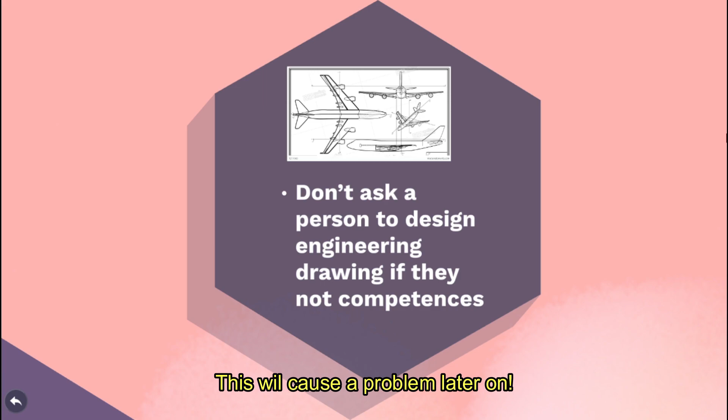Don't ask a person to design an engineering drawing if they're not competent. If someone doesn't have any competency in their field for drawing, you should not ask them to draw mechanical or electrical drawings. This will cause a problem later on, so you must not hire someone who is not competent.

Next is don't sign or stamp a report or plan that you did not create. If you are not sure where the plan or report came from, you must not sign it, because if you sign any report or plan, it means it is under your responsibility.

The third one is political parties. Do not engage or form a partnership with any party that is not permitted. As you all know, there are a lot of parties in Malaysia, and many of them are not permitted, so you should be aware of it.

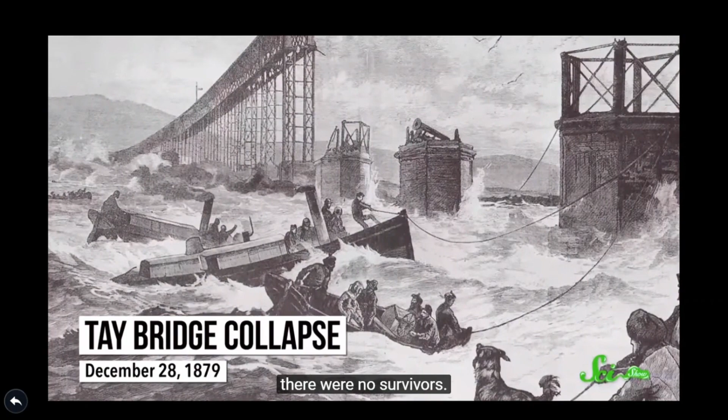When it opened in 1878, Scotland's 3.2-kilometer Tay Bridge was the longest bridge in the world. It was so impressive that Queen Victoria knighted Thomas Bouch, the bridge's designer, after she took the train across it. But on December 28, 1879, a train was crossing the Tay Bridge during a violent storm when the middle of the bridge collapsed. The bridge, the train, and the 60 or so people on board crashed into the water below. There were no survivors. An official investigation found so many problems with the bridge's construction and design that they couldn't even figure out what failed first.

But according to their report, Bouch did just about everything wrong. They tested a lot of the bridge's surviving components, for example, and found that they couldn't stand anywhere near the pressure they were supposed to. So the bridge would have failed eventually anyway, and the storm just accelerated things.

Investigators looked at the columns that had been holding the bridge up and saw that they were broken at the bottom, so the columns might have been responsible for the bridge's collapse. The winds could have made the train rock as it went along, maybe even forcing it against the bridge's walls. If that had happened, it would have put a lot of extra stress on those columns, breaking them and bringing the bridge down.

Whatever the reason the Tay Bridge fell, engineers found even more problems when they looked at some of Bouch's other projects. Some of their components were either just as badly made as the ones on the Tay Bridge, or arranged in ways that meant they couldn't hold much weight. Apparently, he just wasn't a very good engineer. The Tay Bridge disaster made it clear that those projects were also ticking time bombs, and that bridge inspections had to be way more thorough.

The other bridges were either quickly repaired or destroyed to prevent another disaster. But the Tay Bridge, of course, was not the last bridge to collapse. The Quebec Bridge was set to become the longest cantilever bridge in the world when construction began in 1900, but it collapsed twice before it eventually claimed the title in 1917.

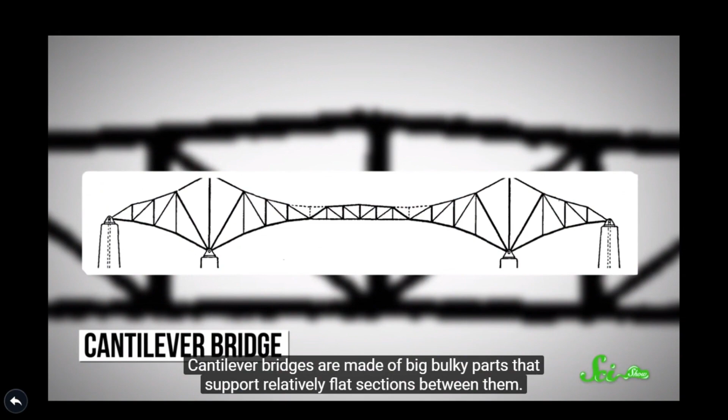Cantilever bridges are made of big, bulky parts that support relatively flat sections between them. During construction, workers kept noticing that some of the support pieces were bent more than they should have been. They were holding way more weight than they were designed to, partly because the bridge ended up longer than it was originally planned to be, but to save time and money, extra support wasn't added.

The designers hoped that the problem could be fixed as construction went on, but at the end of the workday on August 29, 1907, parts of the bridge collapsed under their own weight, killing 75 workers.

Construction resumed after investigators figured out what happened. Their main conclusion was that the bridge's components just weren't strong enough. So the bridge was rebuilt, this time much bigger and stronger, but all that extra metal made it much heavier too.

As the middle section was hoisted into place in 1916, the equipment bringing it up broke and it plunged into the river below. This time, 13 people died.

The Quebec Bridge disaster was a reminder that it's important to make sure that the thing you're building can carry the weight you're putting on it, and it probably would not have happened today. Over the last century, engineers have developed tons of new mathematical techniques and computer programs that probably would have caught the first collapse long before the bridge was even built.

Even before it opened in 1940, people noticed something strange about Washington State's Tacoma Narrows Bridge. It moved. Gentle winds could make the long suspension bridge flex up and down by meters at a time, making it hard to drive or even walk across. The bridge's designers tried to keep it from bouncing so much by installing shock absorbers, but they weren't very effective.

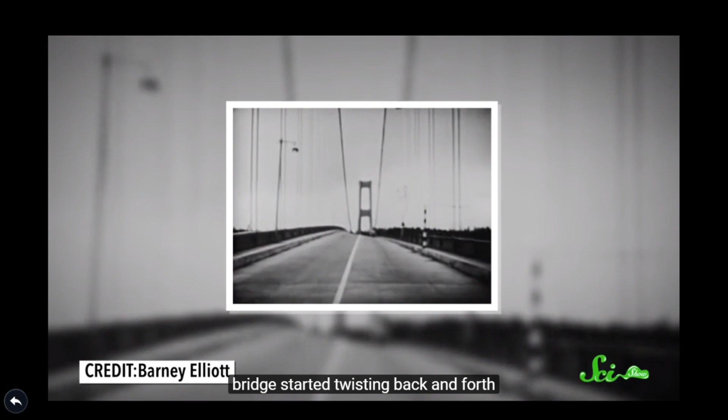When that first cable snapped, its side of the bridge fell slightly because it was less supported. Then other cables on that side pulled up like stretched out rubber bands, and the bridge started twisting back and forth. Then the wind gave each twist a little boost. Those small boosts built up over the course of the morning and eventually twisted the bridge apart.

Engineers learned their lesson pretty quickly and reinforced the Bronx Whitestone Bridge in New York, which was also known to flex in the wind. That bridge is still standing today. But not all failed construction projects have been bridges, though.

The 40-story Hyatt Regency Hotel opened in Kansas City, Missouri in 1980, and it quickly became known for its innovative atrium, which featured 3 long walkways that seemed to float in the air. The hotel called them skywalks. Instead of being supported by pillars, each skywalk was suspended from long rods hanging down from the ceiling. The second-floor skywalk hung below the fourth-floor skywalk, with the third-floor skywalk off to the side on separate supports.

Their unique design made the huge atrium an ideal place to host events and parties, like the one that the hotel hosted on July 17, 1981.

About 1,600 people attended. Hundreds danced and talked in the atrium, while others milled around the hotel and checked out the famous skywalks. Then, at 7:05 p.m., two of the skywalks suddenly collapsed without warning.

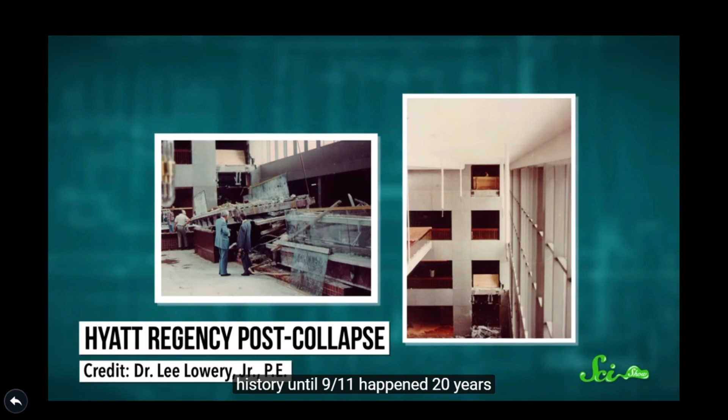114 people were killed and more than 200 were injured, making the incident the deadliest structural collapse in U.S. history until 9/11 happened 20 years later.

Investigators found a small, last-minute change to the rods holding the two collapsed skywalks that meant that instead of each holding its own weight, they were linked together.

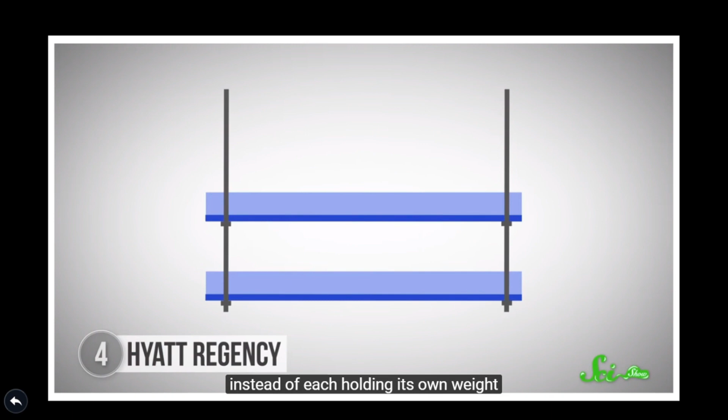Originally, rods went from the ceiling all the way through the fourth-floor skywalk and down to the second-floor one, with pieces underneath each skywalk supporting its immense weight. But after the change, the second-floor skywalk hung from the fourth-floor one. So supports for the fourth-floor skywalk weren't just holding up one 29-metric-ton skywalk, they were holding up two of them.

It also didn't help that to save some money, the building materials themselves weren't quite as strong as they should have been, and on the night of the party, the extra weight of a couple dozen people standing on the skywalks proved to be too much. What seemed like a tiny change to their construction turned out to have terrible consequences.

Manhattan's Citicorp Tower, now just called 601 Lexington Avenue, proves that projects with problems don't always end in disaster. The skyscraper's triangular top makes it stand out from afar, but you'd notice something else if you were just walking by. Citicorp Tower was built on stilts, which turned out to be a problem.

The stilts were built to accommodate a church next door that essentially said they could build the skyscraper on the property as long as it didn't block the church. So the building's designers just decided to start most of the tower nine stories up.

They knew that such a tall building with so little on its bottom floors could be prone to toppling over in strong winds, so they wanted to make sure that it could withstand even the strongest winds blowing against its windows. So they added extra weight to the top of the tower that moved in the opposite direction of any lean the wind might cause.

Wind against a skyscraper's corners usually just sort of slides past the building, so Citicorp Tower's designers didn't even bother checking for them. That probably would have been fine if the stilts were on the corners. But because of that weird thing with the church, the building's stilts are in the middle of its sides.

Let's have a look at metal industry accidents. This will open your eyes. Please have a look. Top 10 accidents in metal smelting.

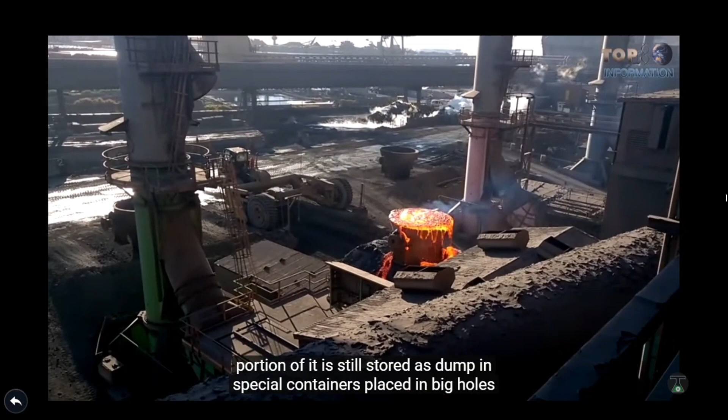Number 10: slag explosions. Slag, or metal waste, is the waste material after ore purification that will not be used in metal processing. Though there has been progress in recycling this waste material in recent years, a significant portion of it is still stored in dumps, placed in special containers in big holes on the ground. At least 24 hours are needed for slag to become solid and be disposed of. We must point out that after that time, the waste is still red hot.

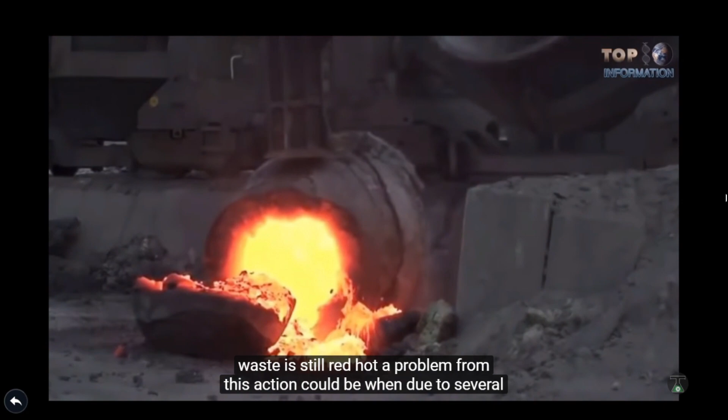A problem from this could arise due to several factors. When metal impurities mix with water, for instance, a big explosion can occur. In addition, just a little amount of liquid is enough to start a deflagration. Slag also brings other hazards to workers, though they are less visible. On some occasions, it emits toxic gases that could be lethal if workers do not have proper protection.

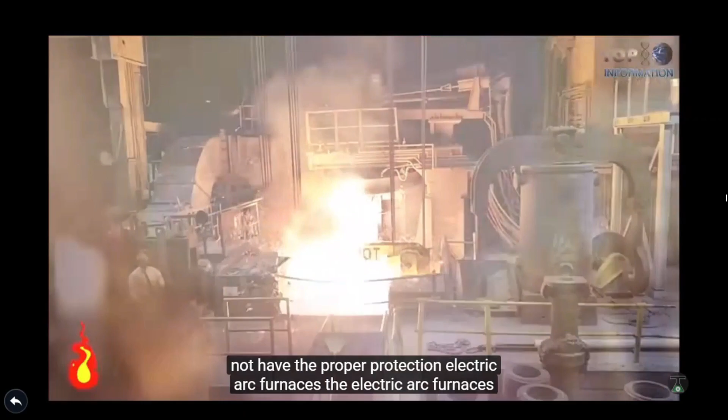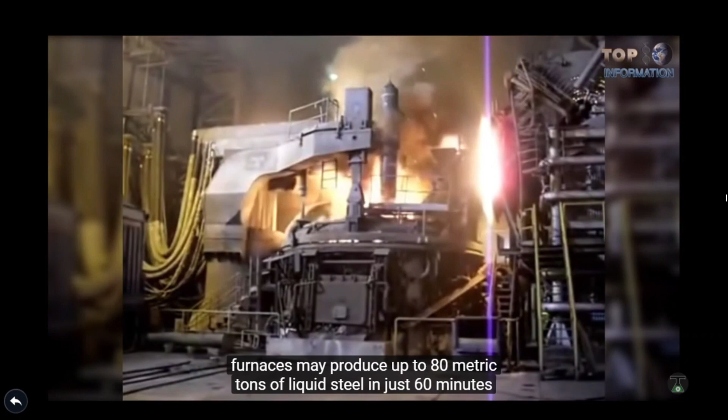Number 9: electric arc furnaces. Electric arc furnaces have been substituting traditional furnaces in many steel plants worldwide. The main reason for the substitution is their high effectiveness when producing metal from ore. For example, in more advanced workshops, these types of furnaces may produce up to 80 metric tons of liquid steel in just 60 minutes of operation.

To heat steel, an electric current going from one electrode to another is used. Despite the fact that these types of furnaces are considered much safer than the former ones, they are not free from risk. They must be cooled with water, and any small mistake when introducing the electrodes into them, or any trace of moisture on them, could produce an explosion.

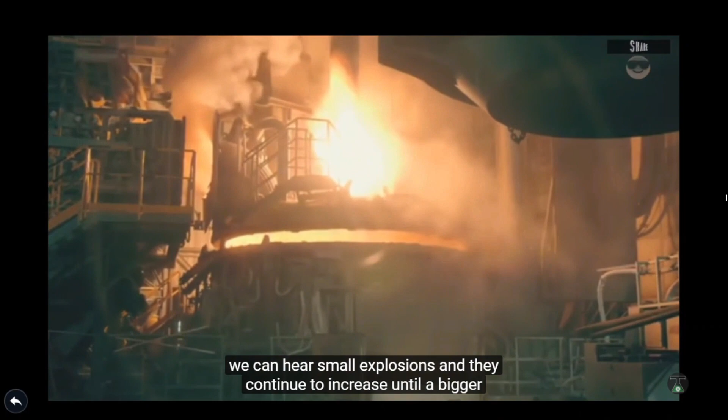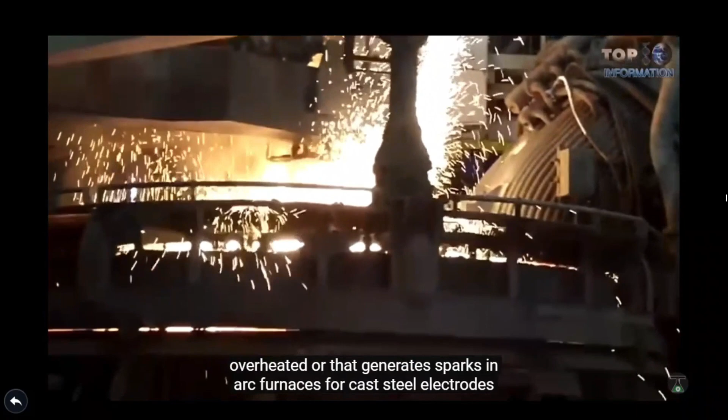This is what seems to happen in the video. When it is very hot, we can hear small explosions, and they continue to increase until a bigger explosion occurs. Another explanation for this explosion may be mechanical human error when introducing electrodes that have been overheated or that generate sparks. In arc furnaces for cast steel, electrodes are put in on top of the tank, and it is not always easy to do properly. On the other hand, accidents like the one in this video can occur.

In this case, the problem may be caused by the amount of slag in the furnace. This material behaves similarly to volcanic lava. Flames spread everywhere, and in the end, all the content is spread all over the place.

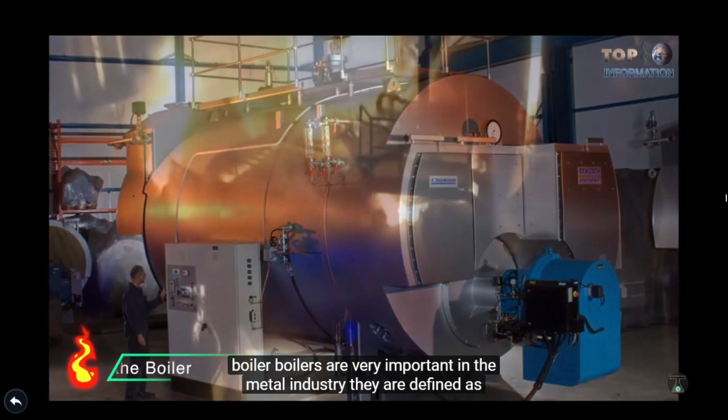Number 8: explosion in the boiler. Boilers are very important in the metal industry. They are defined as closed pressure vessels where a fluid is heated by applying the resulting heat externally.

There are diverse types of boilers with different characteristics depending on their structure and way of functioning. In general, they involve several safety measures, but when they fail, serious accidents may occur. The most serious accidents can produce dangerous explosions.

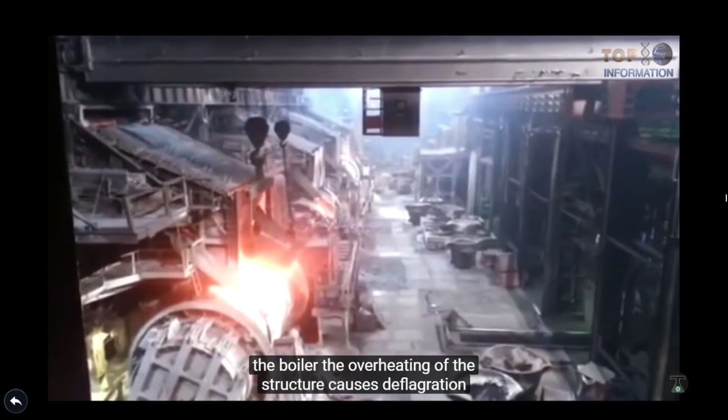One of the main causes of these explosions is a low level of water needed to cool the boiler. The overheating of the structure causes deflagration and a subsequent disaster. All boilers must have at least two indicators for water levels. Accidents are normally produced by human error in the maintenance of this device.

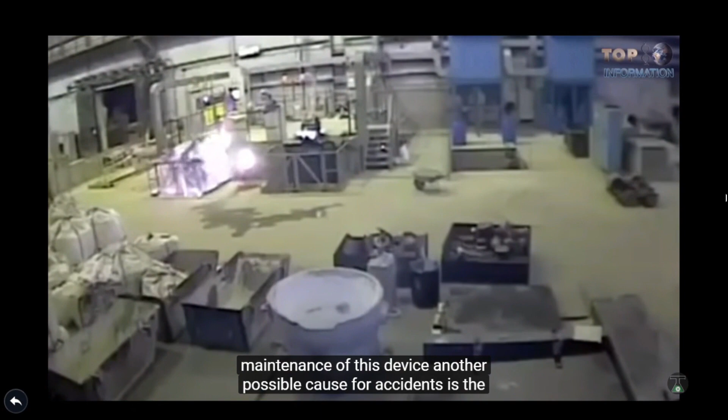Another possible cause for accidents is corrosion of the material they are built with, and of course, when water is mixed with the boiler content.

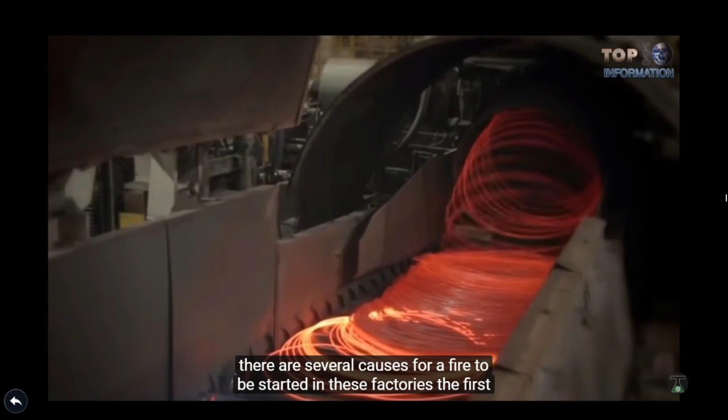One of the hazards to be considered in the metal industry is fire. Fire increases the possibilities for accidents to occur. There are several causes for a fire to start in these factories. The first cause to be considered is static electricity.

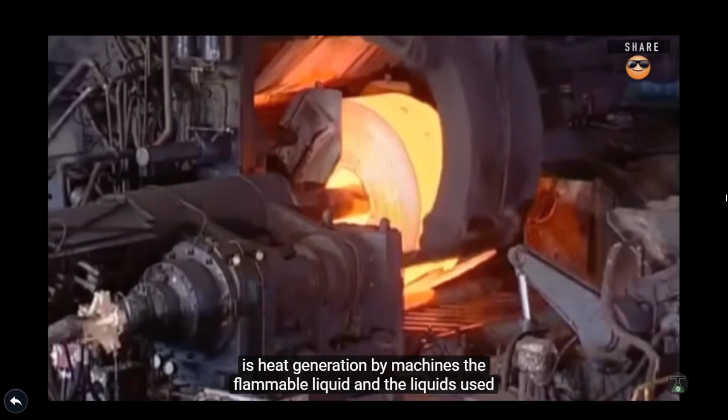Static electricity is originated by surface friction, and it can accumulate until it begins to produce sparks that will start the fire. Another cause of these accidents is heat generation by machines.

We can also point out causes of fire such as the overheating of electricity conducting cables and the spontaneous combustion of chemical products produced by high temperatures that are usually common in these factories.

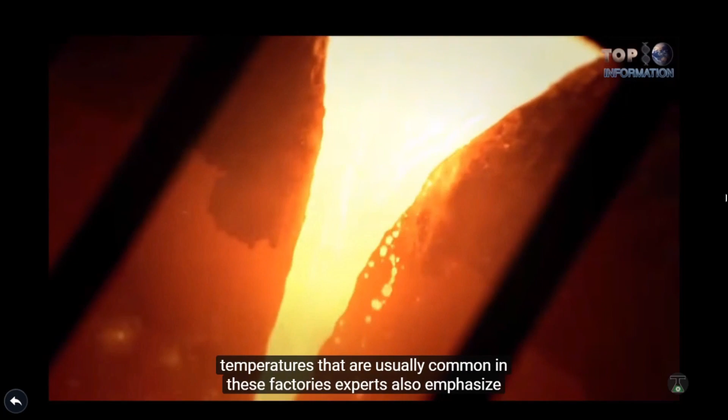Experts also emphasize the use of oils to lubricate or cool the machines. These oils are in many occasions responsible for the start of fires. They also contribute to their fast spread and very dangerous toxic smokes.

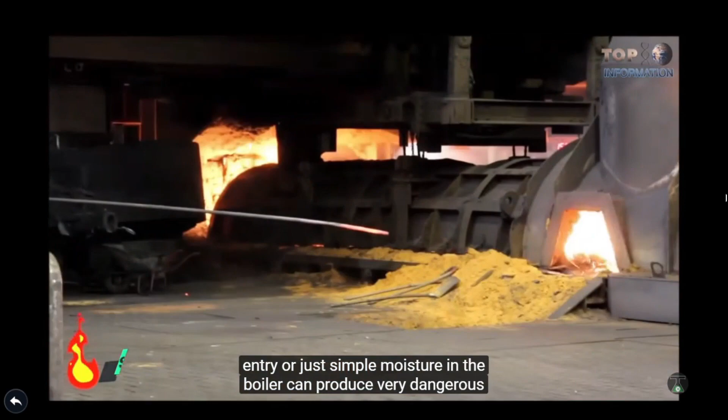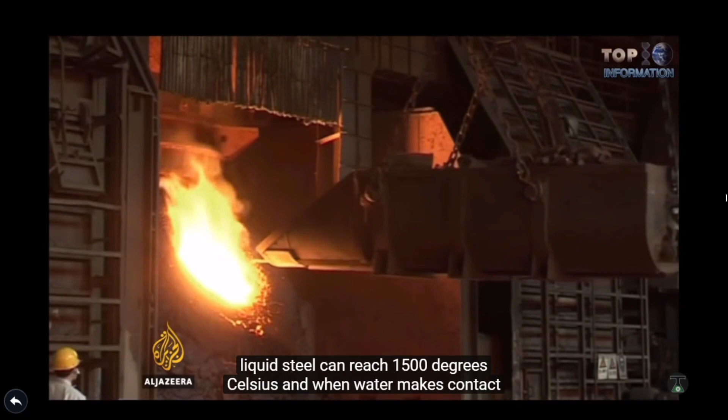Number 6: Moisture. Water entry or simple moisture in the boiler can produce very dangerous explosions that could put at risk the workers' integrity in the metal industry. Liquid steel can reach 1,500 degrees Celsius, and when water makes contact with it, everything put together can explode.

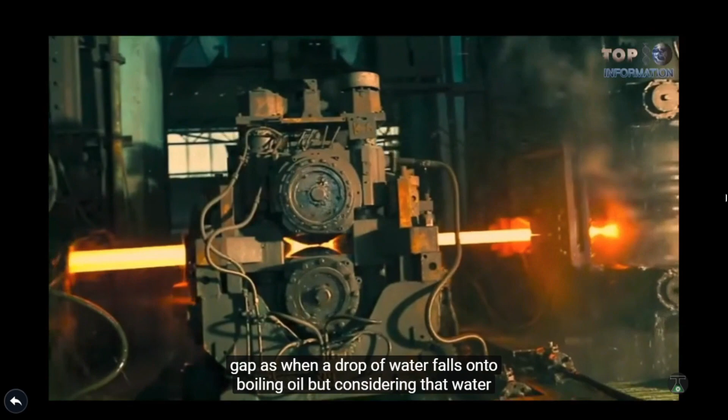It is important to know that water boils at 100 degrees Celsius. Therefore, when water is mixed with the metallic material, it starts to boil violently. It is important to consider the comparison of a drop of water falling onto boiling oil, but also that water expands 1,700 times when it transforms into steam.

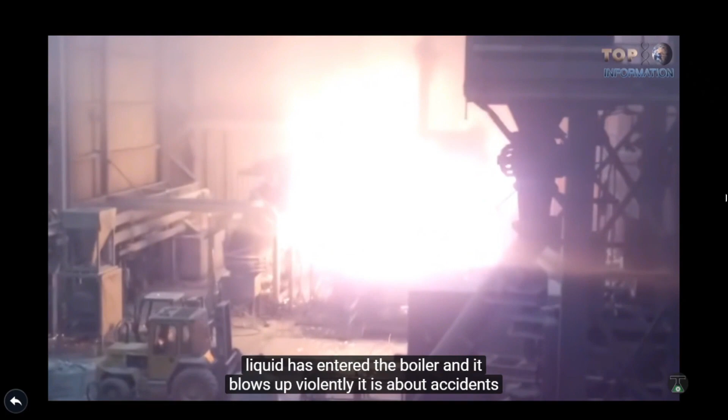This causes explosions in closed spaces. This effect can be seen perfectly in this video: the liquid has entered the boiler and it blows up violently.

These are accidents that often occur in autumn and winter, when there is more moisture in the environment. Besides this, water can enter the boiler accidentally through a break in it. Similarly, these accidents are likely to happen when the machine has not been preheated properly.

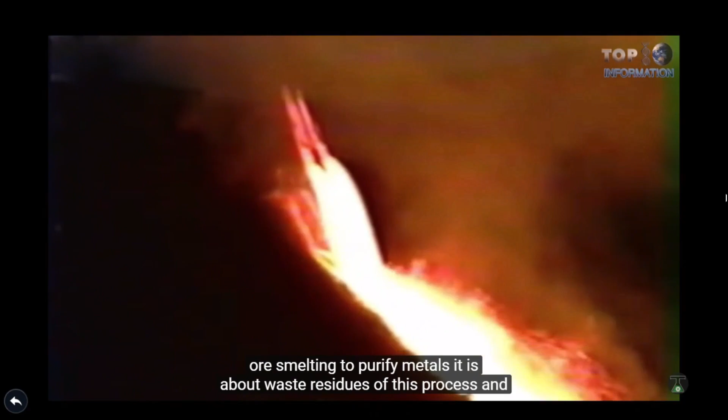Number 5: Dumping of slag. We cannot consider slag dumping itself an accident, but the consequences of this action can be very negative. Slag, or waste, originates from ore smelting to purify metals. It is a residue of this process, a mixture of metallic oxides, and in some occasions it also contains metal sulfides.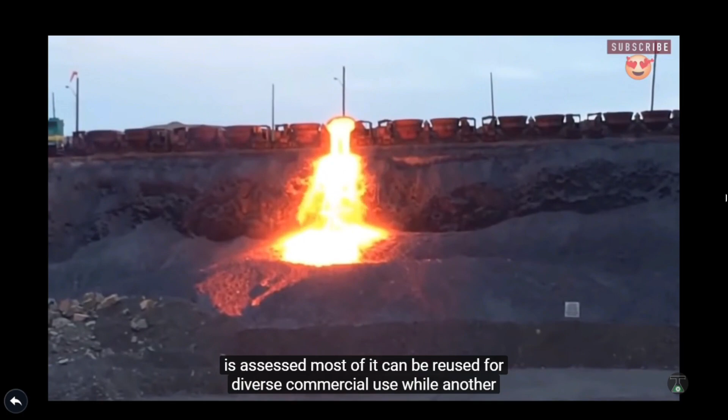At present, slag storage and later treatment is carefully assessed. Most of it can be reused for diverse commercial purposes, while another part is dumped in special areas.

The problem arises when industries located in countries that are disrespectful with the environment dump these wastes into natural areas, or when by accident they end up out of the designated dumping grounds, causing damage to soil and rivers, as happened in Hungary.

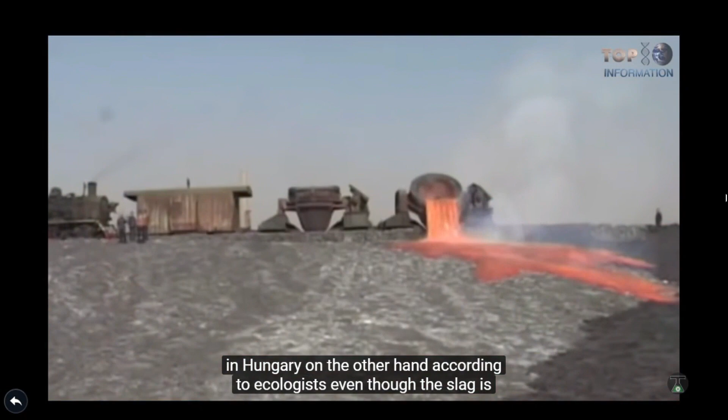On the other hand, according to ecologists, even though slag is dumped in authorized areas, it always causes high pollution, reaching fields and water far away from the dumping area.

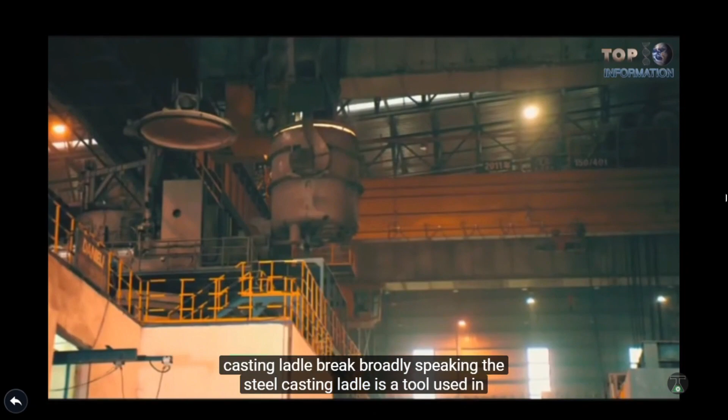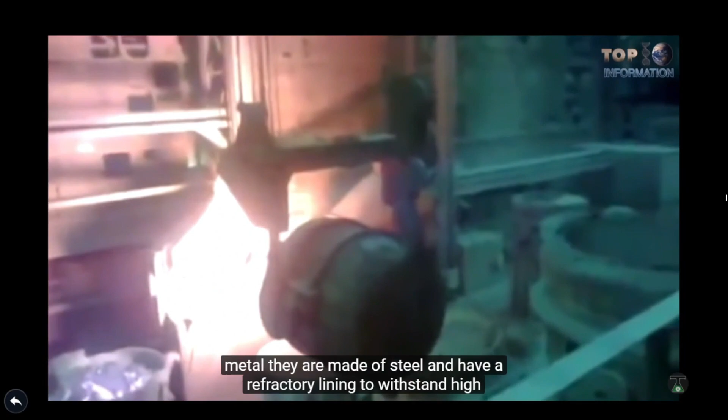Number 4: Steel casting ladle break. Broadly speaking, the steel casting ladle is a tool used in metal refining and casting. It is used to transport and pour red-hot metal. Ladles are made of steel and have a refractory lining to withstand high temperatures.

Lately, the ladle has become a metallurgic reactor. This has obviously expanded not only its capacity, but also increased the possibility for accidents to occur. As you see in this video, the workers driving the crane made a mistake that fortunately did not cause damage.

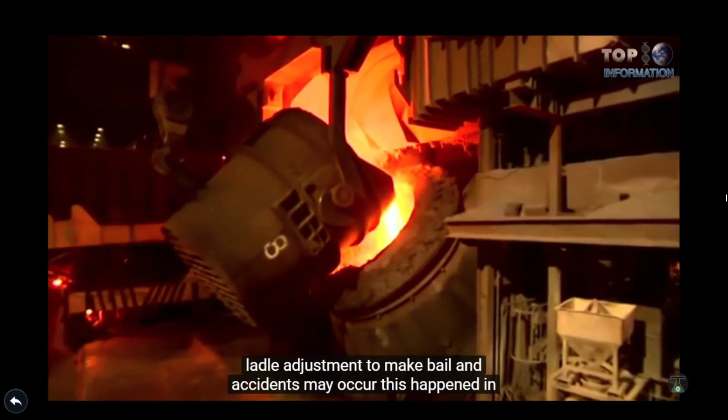Moreover, when pouring the metal cast, the ladle adjustment may fail and accidents may occur. This happened in Huachipato, where an explosion took place.

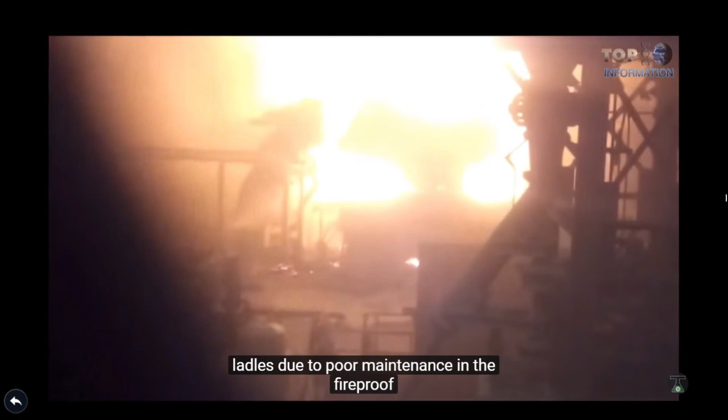To finish it, it is important to point out that sometimes there may be mechanic failures in the steel casting ladles due to poor maintenance in the fireproof lining. High temperatures of metals may damage the ladle when the cast metal is poured into it. In those events, workers are exposed to high risk as dangerous fires can suddenly be started.

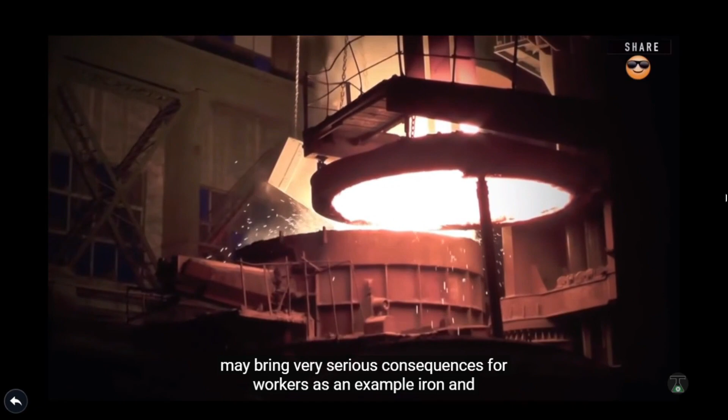Number 3, molten metal splashes. One of the most common risks in metal smelting are the splashes of molten metal. It is in fact one of the points for risk prevention, because of the relative frequency of an event like that. It also may bring very serious consequences for workers. As an example, iron and derivative alloys, such as steel, can reach a melting temperature of about 1,700 degrees Celsius.

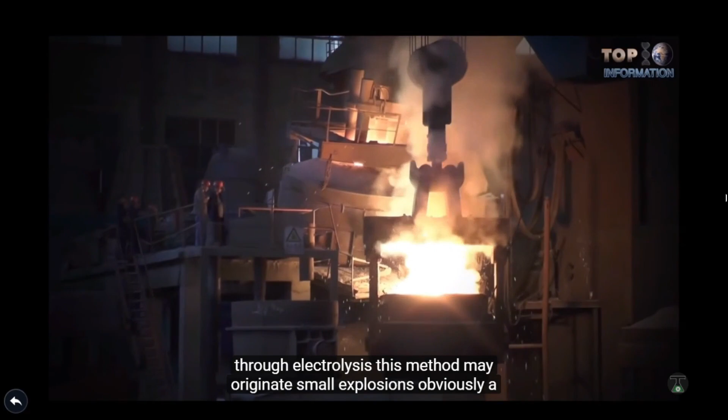One of the causes often pointed out by experts is electrolytic reduction, a method to eliminate oxygen from metallic oxides through electrolysis. This method may originate small explosions. Obviously, a splash at that high of a temperature can cause serious injury. That's why the selection of fabric to make the protective suits is very important, as these suits could protect and save lives.

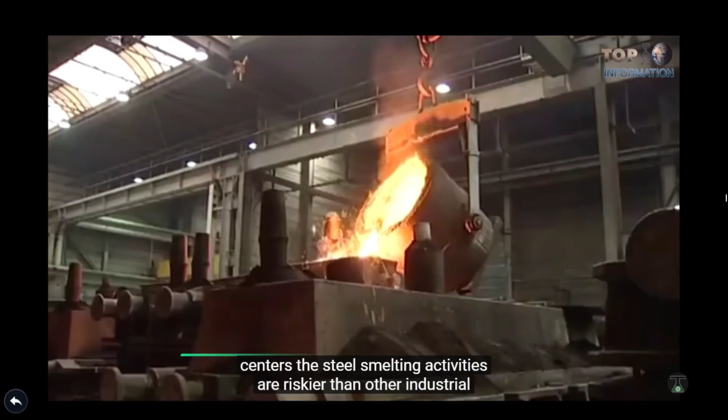Number 2, eruptions in metal casting centers. The steel smelting activities are riskier than other industrial activities. One of the causes is, in fact, the high possibility for explosions to occur.

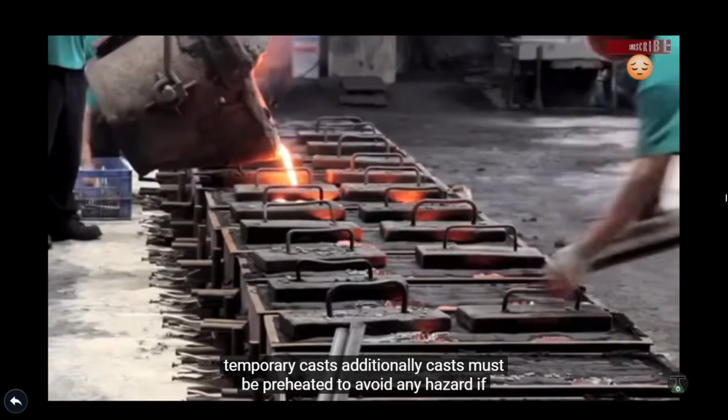A very risky event is the metal casting process, which consists of pouring the smelted metal into a cast for it to become solid. One of the causes in this process for an explosion to occur is water in any component involved, for instance, rest of water in the sand used to make temporary casts. Additionally, casts must be preheated to avoid any hazard. If there is liquid in any of the other pieces, this could also cause deflagration.

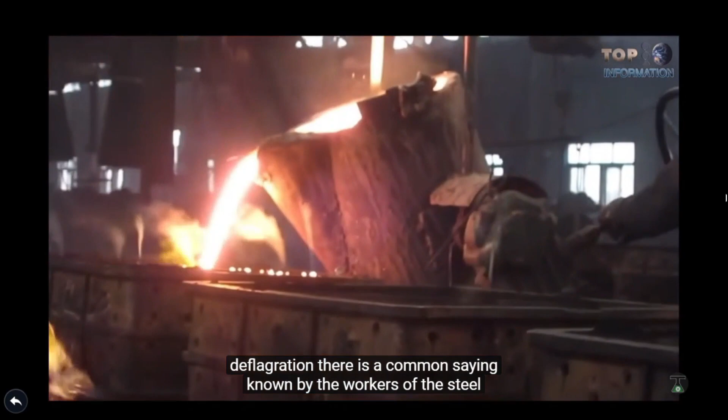Number 1, fire loops or cobble. In spite of its showiness, this kind of accident can be lethal for workers who are near. The temperature of this kind of molten metal loop is extremely high. These loops are capable of causing very serious injuries to anyone who is reached or touched by them. It could be said that these loops are sort of a spill of the smelted metal.

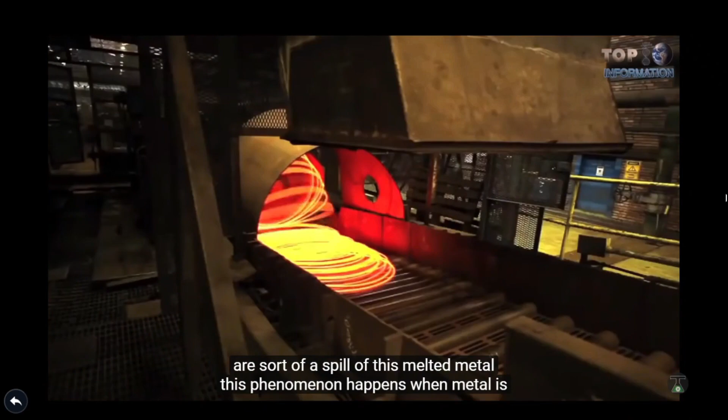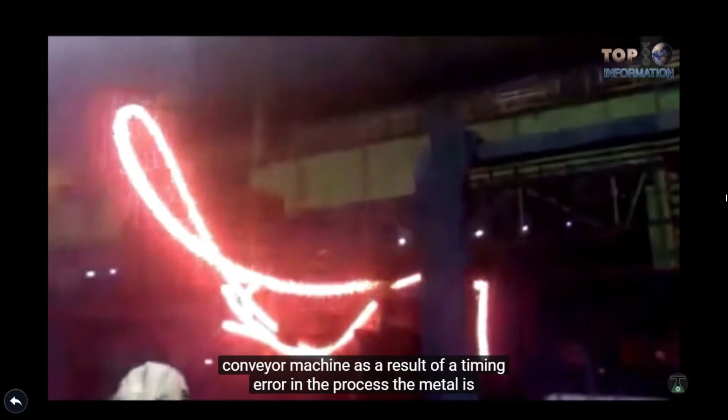This phenomenon happens when metal is heated and put onto rollers to change its shape and send it to a conveyor machine. As a result of a timing error in the process, the metal is ejected at a very high speed from its way in the rollers. It is necessary to take into account that these rollers leave less room among them as the process is in progress, which is why they get this strange shape and fall forming burning circles.

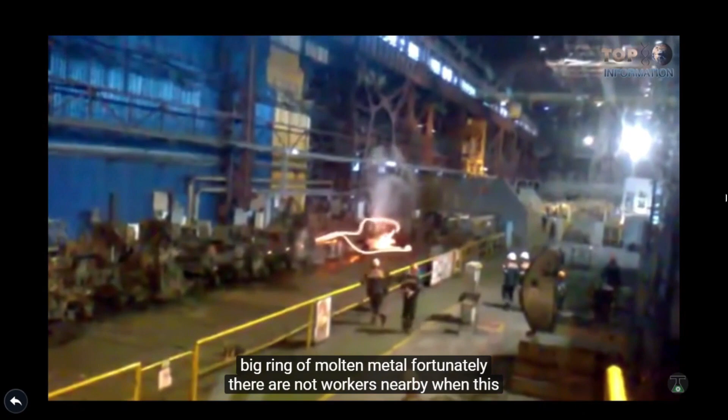We can see an example in this factory in Poland. We can see perfectly the moment when the metal is shot out from the rollers and forms a big ring of molten metal. Fortunately, there are no workers nearby when this happens, as there are no protective suits to resist the high temperature of these loops.

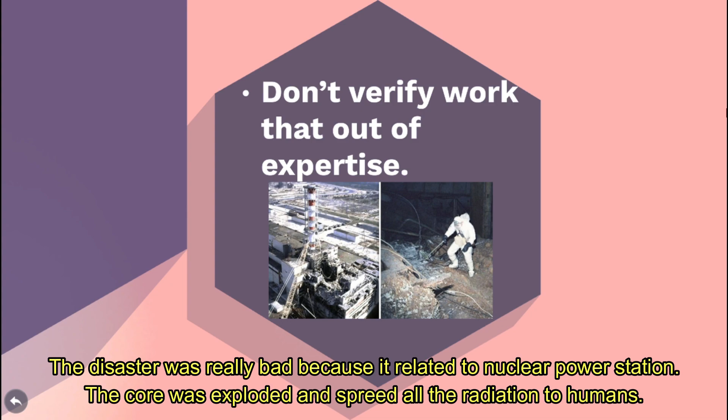As you can see in the picture below, it was the disaster at Chernobyl, located in Russia or the Soviet Union. The disaster was really bad because it related to the nuclear power station. The core exploded and spread radiation to humans, making them feel sick and develop cancer for a long time. This disaster shows how unqualified workers were used to run the nuclear reactor.

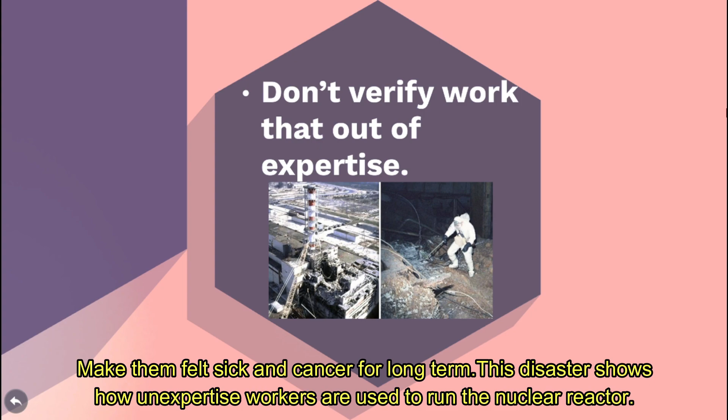The next is unqualified. Do not accept staff that are not qualified enough. If you become a boss one day, please make sure all your staff are qualified. If you need someone at a low level of education like SPM, or a higher education level like diploma or bachelors, make sure they are qualified enough to take the job.

Okay, the fifth column is justification. Don't delay approval without justification. If something needs your approval for them to do their jobs, please do not delay it without any justification. If you delay the approval, it will make it hard for them to do their work, and the progress of the works will become slow. So if you need to delay the approval, please give justification.

The last one is delay. Please do not delay inspection of work without any strong reason. If you are someone who needs to do an inspection of the work, do not delay it, because every inspection has its timeline. If you delay, you are taking others' time for their own inspection. So please respect your time and others.

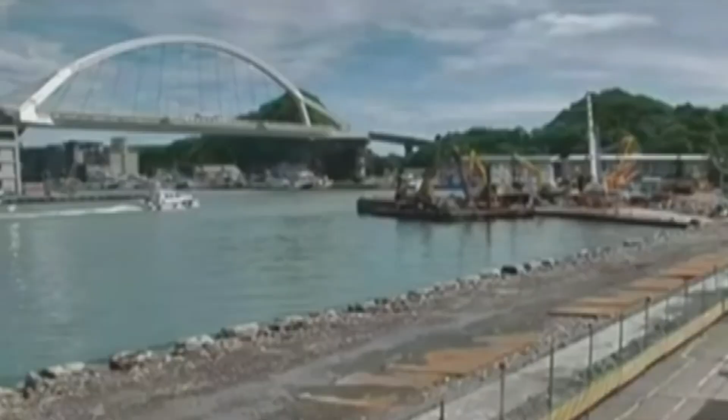A collapsing bridge is a terrifying thought for many. Here are 10 bridge failures explained. Number 10: The Nanfang'ao Bridge Collapse of 2019. This relatively new bridge in Yilan County, Taiwan, experienced an epic fail when it collapsed in October 2019. The bridge's collapse was caught on camera. The bridge, a 459-foot single-arch bridge, was built in 1998.

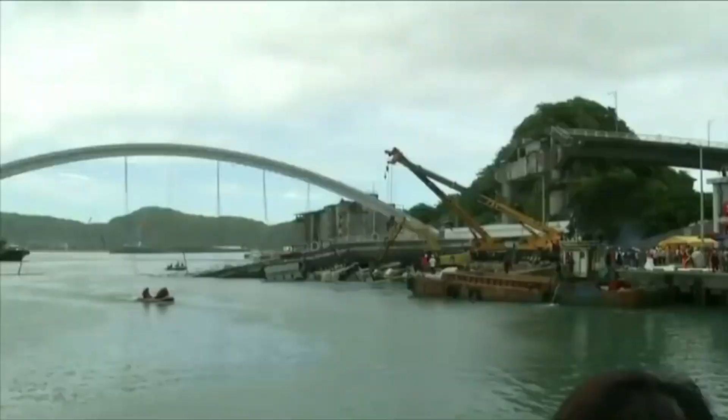But on October 1st, 2019, the bridge gave way, sending a petrol tanker into the water below. The total death count caused by this collapse is unclear, as some missing people have not yet been found, but there have been at least 6 confirmed deaths. The cause of the collapse is still being investigated, but it was likely caused by heavy rains coupled with high winds.

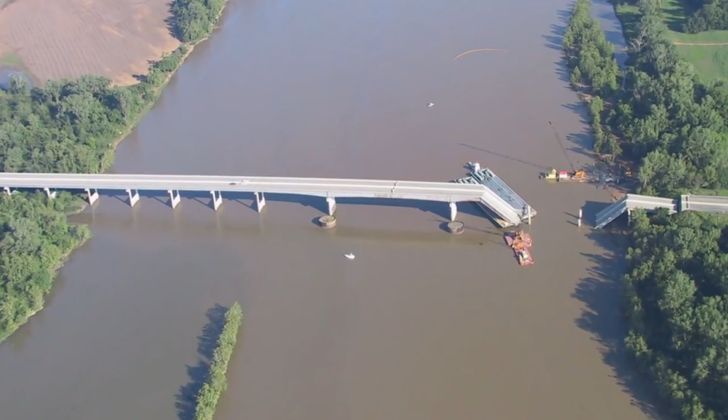Number 9: The I-40 Bridge Collapse of 2002. On May 26, 2002, the I-40 bridge experienced a massive collapse. The bridge, located in Webbers Falls, Oklahoma, fell into the Arkansas River at the Robert S. Kerr Reservoir. This caused 8 passenger vehicles and 3 semi-trailers to also fall into the river. Nearby fishermen were quick to respond and helped pull people from the river. But even with rescue efforts, 14 people lost their lives in the collapse, and another 11 were injured. The collapse was caused by Joe Dedmon, who was the captain of a towboat.

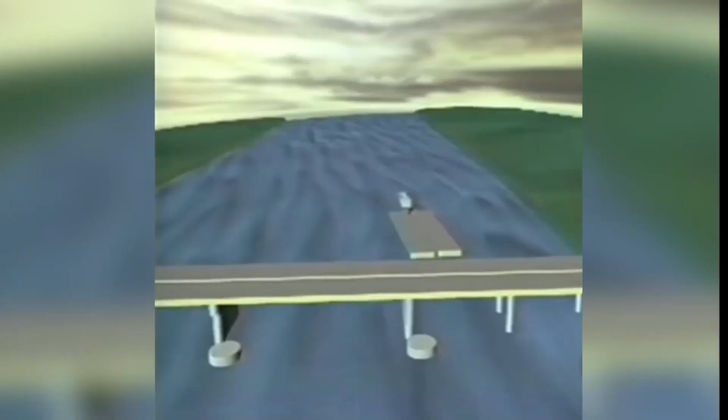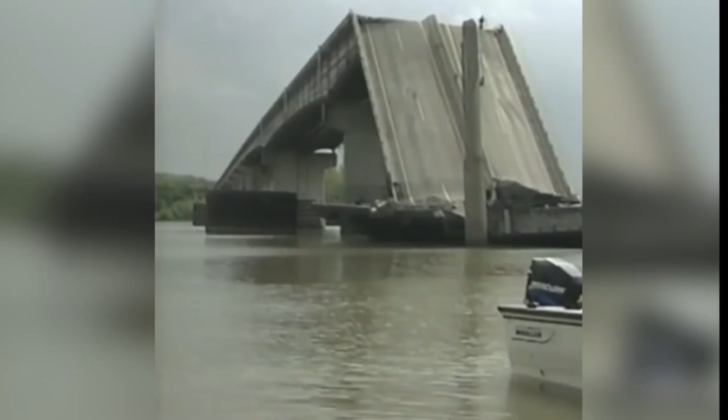Suffering from abnormal heart rhythms, Dedmon lost consciousness and thus lost control of the barges he was towing. The barges collided with the bridge pier, causing the 580-foot bridge to collapse. It took 2 months to rebuild the bridge.

Number 8. The Majerhat Bridge Collapse of 2018. The Majerhat Bridge in Kolkata, India, had been under scrutiny for some time before it finally collapsed on September 4, 2018. The bridge was 50 years old and beginning to show signs of wear and tear. Commuters and local police were concerned by the cracks in the bridge, and an audit in 2016 warned that the bridge was unsafe. Furthermore, the bridge did not receive the proper road maintenance that it required. So it was not surprising that the bridge finally gave way. The collapse injured 25 people, and 3 people died in the collapse. The collapse was preventable if the proper measures had been taken.

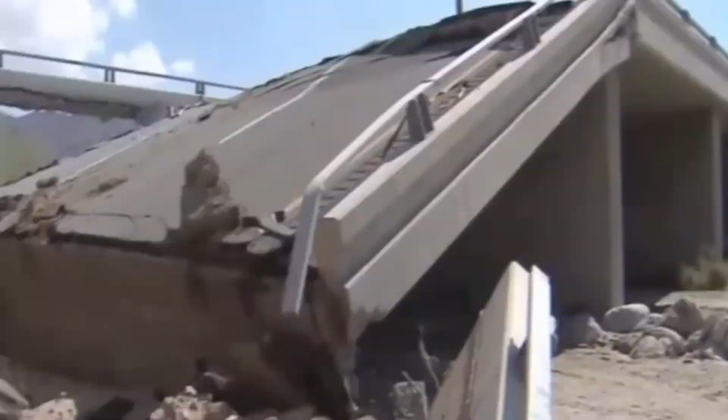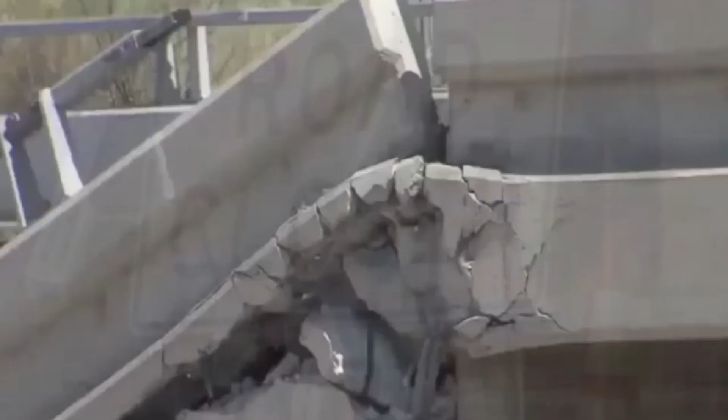Number 7. The California-Arizona Bridge Collapse of 2015. When a section of the Interstate 10 in Southern California collapsed, it brought catastrophic consequences. The collapse involved a section that was only 30 feet long, but it severed off transit between Southern California and Arizona. The very busy road is the quickest way to get from Phoenix to Southern California. With the road closed, thousands of people were forced to detour hundreds of miles to alternate routes. Reports indicate that the failure was caused by floodwaters and that the bridge's structure had been compromised.

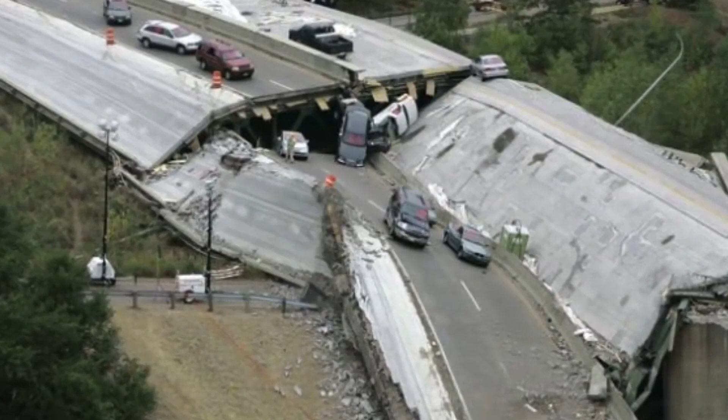Number 6. The Interstate Minneapolis Bridge of 2007. The 35W Bridge was once an 8-lane bridge that crossed the Mississippi River in Minneapolis, Minnesota. The bridge opened in 1967 and quickly became one of the busiest bridges in Minnesota, carrying upwards of 140,000 passenger vehicles per day. But on August 1, 2007, the bridge suffered a catastrophic failure. The failure occurred during rush hour and resulted in the death of 13 people. Another 145 people were severely injured during the failure.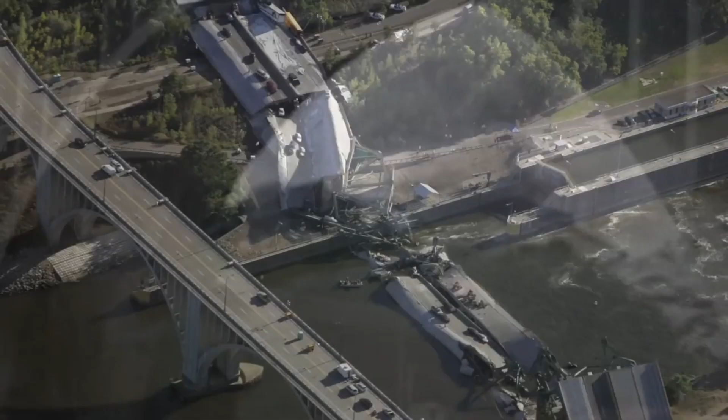The failure was the fault of a design flaw. One of the gusset plates was too thin, causing it to rip through a line of rivets. The bridge was reconstructed after the failure, but did not reopen until September 18, 2008.

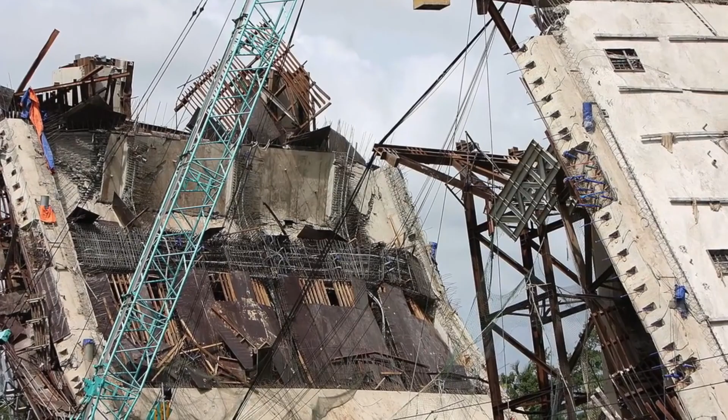Number 5. The Can Tho Bridge Collapse of 2007. On Wednesday, September 26, 2007, a catastrophic bridge collapse resulted in a very high death toll. The bridge, which was 300 feet long and 98 feet above the ground, came crashing down onto an island in southern Vietnam. The collapse has been called the most catastrophic disaster in the history of Vietnam's construction industry. The collapse killed 59 people and further injured another 140. At the time of the collapse, there were 250 engineers working on the bridge. The collapse was horrific, and people who witnessed it said it sounded like a huge explosion when it collapsed.

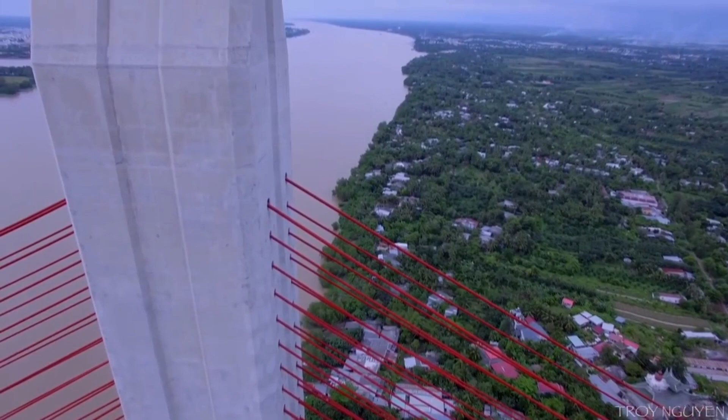The collapse was caused by human error. Heavy rains had softened the foundations of the pillars that held up the bridge. Construction workers had moved temporary pillars before the permanent ones, poured only 2 days prior, were stable enough to hold the weight of the bridge. These two things combined caused the bridge to collapse.

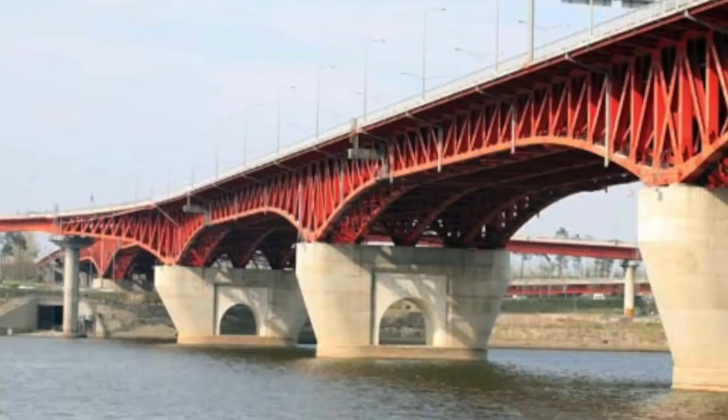Number 4. The Seongsu Bridge Collapse of 1994. The Seongsu Bridge is located in Seoul, South Korea. On October 21, 1994, the bridge suffered one of the worst collapses in recorded history. The collapse was due to a structural defect. The steel trusses that were part of the suspension structure underneath the roadway were not welded properly. When they came undone, they caused a massive section of concrete to fall into the water below. 17 people were injured in the bridge's failure, and 32 people were killed.

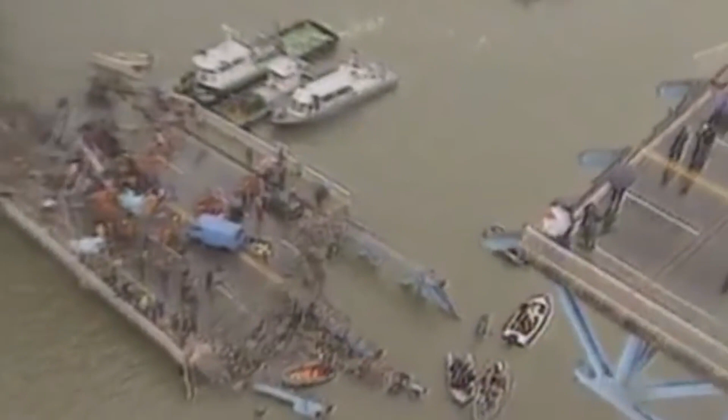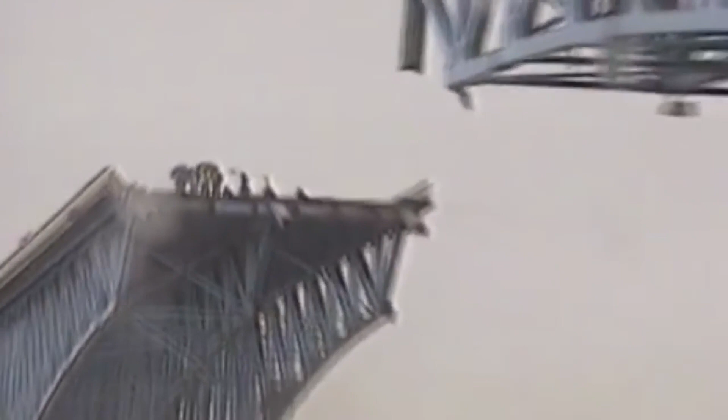The bridge was scheduled to be repaired shortly afterwards, but the structural deficiencies were so severe that the entire bridge had to be redesigned. The new bridge opened on August 15, 1997, and although it looks similar to the original bridge, it is far more stable and structurally sound.

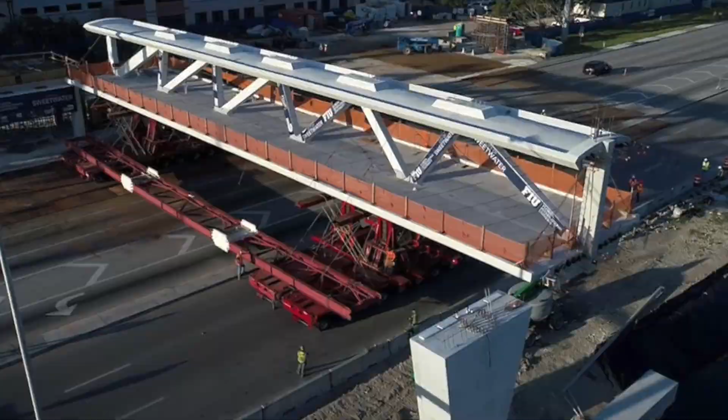Number 3. The Miami Pedestrian Bridge Collapse of 2018. When engineers noticed that the cables holding up a suspended pedestrian bridge in Miami were loose, they ordered that the cables be tightened. But the order came a little too late. While workers were tightening the cables on March 15, 2018, the suspended bridge collapsed, crushing everything beneath it.

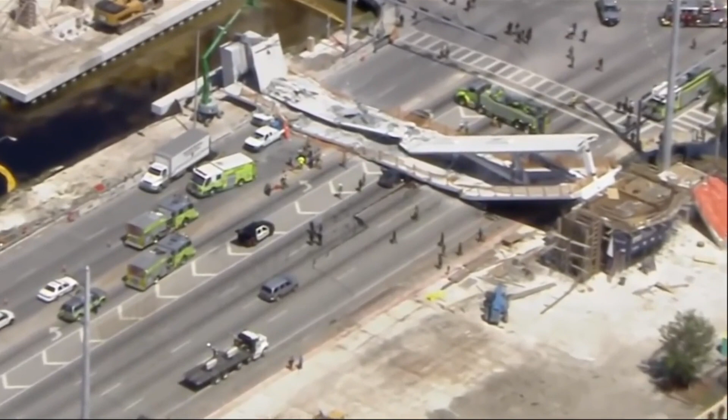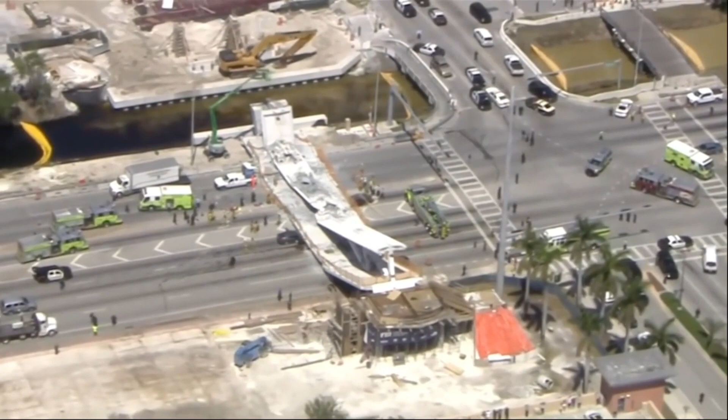The bridge was built between the FIU and the community of Sweetwater as a safe way for pedestrians to cross the busy 8-lane Route 41 highway. The bridge cost $14.2 million and was undergoing stress tests when it collapsed. The bridge, which weighed 950 tons, fell onto vehicles that were stopped at a red light. 6 people were killed, and another 10 were seriously injured.

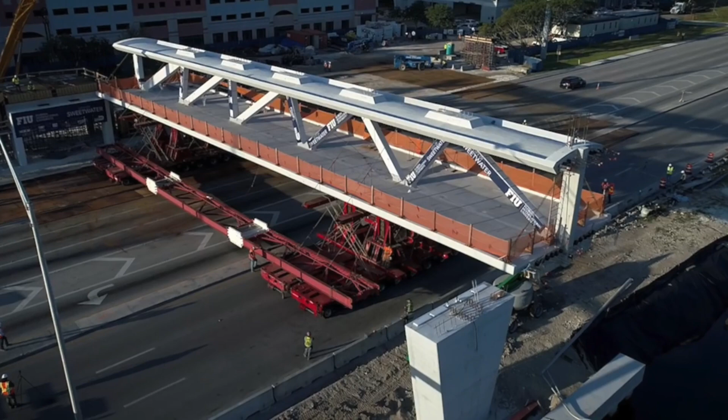The bridge was innovative and unique in its design, namely for its innovative installation. But because the bridge was so innovative, designers had little experience with the actual application of the design. Furthermore, construction had been accelerated to minimize disruption to traffic. So its innovative design and speedy construction made it a risky endeavor. It's unclear exactly what caused the bridge to collapse, but it was likely a design flaw.

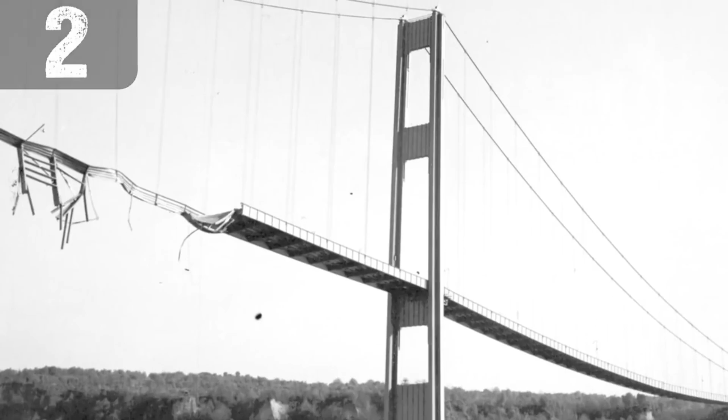Number 2: The Tacoma Narrows Bridge Collapse of 1940. The collapse of the Tacoma Narrows Bridge on November 7, 1940 was a pivotal bridge failure in terms of bridge engineering. The bridge collapsed only 4 months after it had opened, and the collapse was due to aeroelastic flutter, caused by winds that ripped through the bridge at 42 miles per hour. The bridge had been nicknamed Galloping Gertie because it wobbled in the wind.

The bridge was not designed properly to withstand the notorious winds in that area. It was built with solid walls that did not allow wind to pass through it. Thus, wind became trapped within the walls of the bridge, causing it to wobble. During a particularly harsh windstorm, the bridge was no longer able to withstand the wobble, and it gave way, causing it to plunge into the Puget Sound below.

The collapse of the bridge changed bridge engineering in the decades that followed. Engineers were able to learn from their mistakes and create better and stronger bridges that did not have the same flaws as the Tacoma Narrows Bridge.

Number 1: The Ponte das Barcas Bridge Collapse of 1809. Often called the worst bridge disaster in recorded history, the collapse of the Ponte das Barcas Bridge is one of the most catastrophic bridge failures the world has ever seen. The name translates to Bridge of Boats, as it was made from boats and planks.

When the bridge collapsed, people fell into the torrent river, and, unable to swim to shore, they drowned. It was a tragic bridge failure, with unparalleled consequences for the people of Portugal, which is why the Ponte das Barcas bridge collapse has earned the top spot on this list of 10 bridge failures explained.

What can you conclude from the video?

From the video, we can see that some of the accidents are due to human error. If these engineers had prioritized the safety concern, the bridge might be as strong as the Golden Gate Bridge in San Francisco, California, which was built in 1933, and the structure is strong until now.

Next, let's move to the Code of Ethics.

All engineers are expected to uphold the integrity of the profession by behaving in a manner consistent with it. The word ethics originates from the Greek word ethos, meaning character. So, what are the good ethical behaviors an engineer should have?

Do's in the Code of Ethics: First, an engineer must be familiar with the Code of Conduct of Engineers. Second, an engineer must understand the need of responsibility and liability as specified in the Code of Conduct. Next, an engineer must respond promptly to complaints and inquiries by clients or any other authorities.